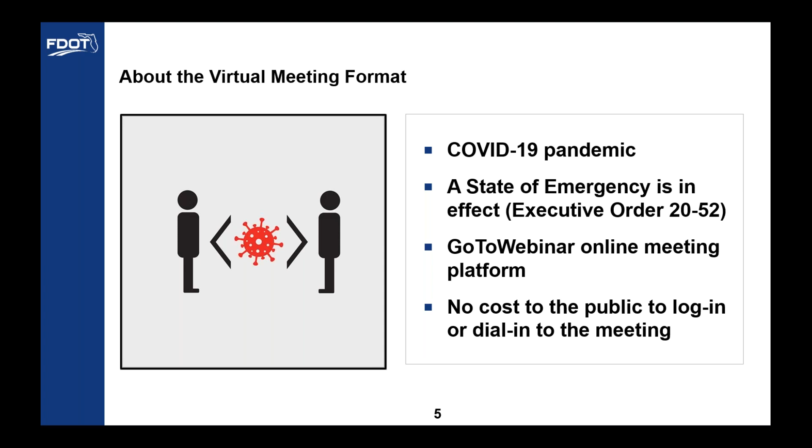On your computer or device screen, you should see something that looks like a control panel in the upper right corner. In it, you will see a chat function. That is what you use to send a comment or question.

For those of you who have dialed into the meeting on a telephone line, and you are viewing a hard copy of the slide presentation, the presenter will announce the page number of the slide being shown on the screen so you can follow along.

All attendees are placed in listen-only mode throughout the presentation and meeting. You can submit comments or questions by typing them in the chat function on the control panel at any time during the meeting. We will provide responses after the presentation, or you can wait to speak at the end of the Q&A session.

This meeting is being recorded and will be available after the meeting. It'll be posted on the project website.

Public notice for this virtual public meeting, including information about how to access the meeting platform, was provided in flyers to property owners and tenants in the project area, a posting in the Florida Administrative Register, advertisement in the Sun Sentinel, and in emails to persons on the project contact list, on social media feeds, and other notification methods. The notice was also posted on the City of Fort Lauderdale's website.

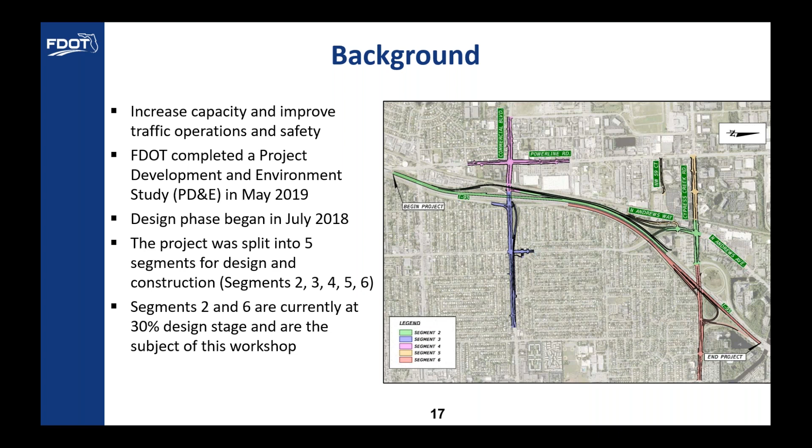FDOT completed what we call a PD&E study, which is a project development and environment study, in May of 2019, and the design phase began in July of 2018. For design purposes, the project has been split into 5 separate segments, starting with segment 2 and running through segment 6, differentiated by the colors you see on the right. What we'll be discussing today are segments 2 and 6 specifically.

Slide 16. Project location. Like I mentioned, we'll be discussing segment 2 and 6 specifically. Segment 2 is shown on the screen in the red color. It includes I-95 southbound from south of Commercial Boulevard to Cypress Creek Road.

It also includes work along North Andrews Avenue, as well as Cypress Creek Road from the SFRTA railroad tracks, which is where Tri-Rail runs, towards the east, towards I-95. Segment 6, which is shown in blue on this figure, covers I-95 northbound and a portion of Cypress Creek Road from I-95 to the east to Northeast 9th Avenue.

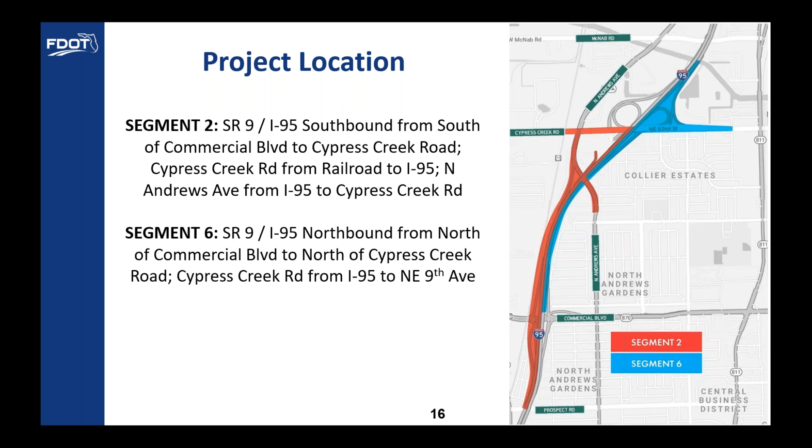Slide 18, I apologize, the numbers are off. Moving into proposed improvements on slide 19, we'll discuss each segment one at a time. We'll start off talking about segment 2, run through a list of the changes that we're proposing, and then move on to segment 6. So what you see up here is the proposed improvements for segment 2.

I-95 southbound within segment 2 will be milled and resurfaced, and we'll have some minor widening for accommodating a new off-ramp. One of the major changes we're proposing here is a new southbound collector distributor road, and a collector distributor road is basically just a ramp. That ramp will run from North Andrews Avenue and the park and ride lot at Cypress Creek Road, over Commercial Boulevard, and then join I-95 southbound. We'll get into more detail with that in just a moment.

We're also going to be milling and resurfacing Cypress Creek Road, as well as some minor widening along Cypress Creek Road. On North Andrews Avenue, we will have milling and resurfacing as well, some minor widening to accommodate bike lanes, but the major improvement there is a replacement of the bridge for Andrews Avenue over I-95. In addition, we're going to have bicycle and pedestrian improvements along Cypress Creek Road, specifically adding a shared use path, a wide path on either side of the roadway that can accommodate pedestrians and bicyclists.

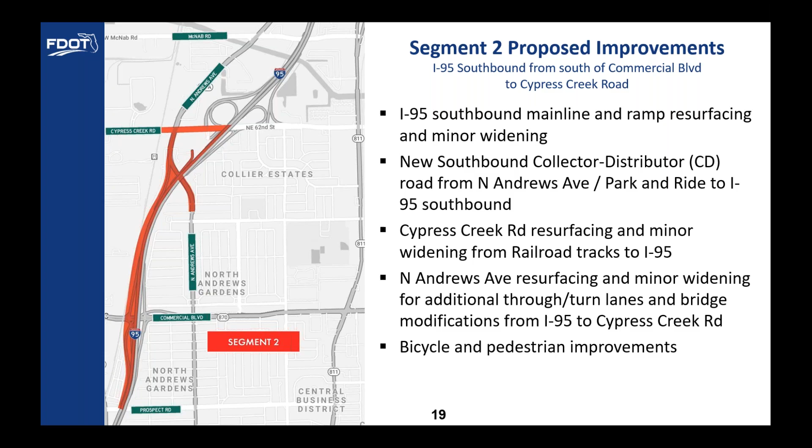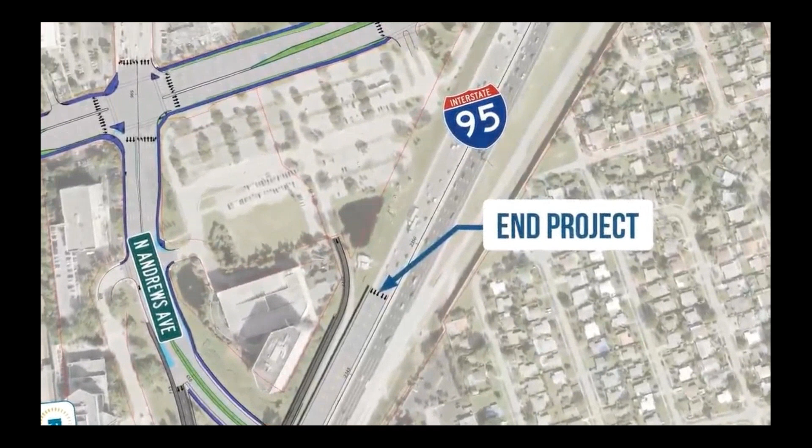Now we have just a short fly through of the improvements that I'll recap again. So you can see here, we'll be going in the direction of traffic along I-95 southbound, starting just south of Cypress Creek Road and heading towards the south. We'll be modifying the existing on-ramp from the park and ride lot as it is today.

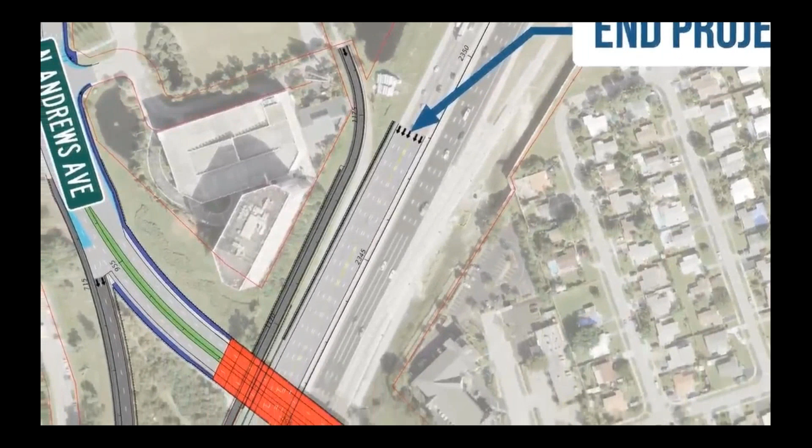That goes directly onto I-95. You can see here, it'll stay separate from I-95, cross under the Andrews Avenue Bridge, and join in with the ramp that comes on from Andrews Avenue. Those two ramps will come together as a 3-lane ramp that eventually drops down to 1.

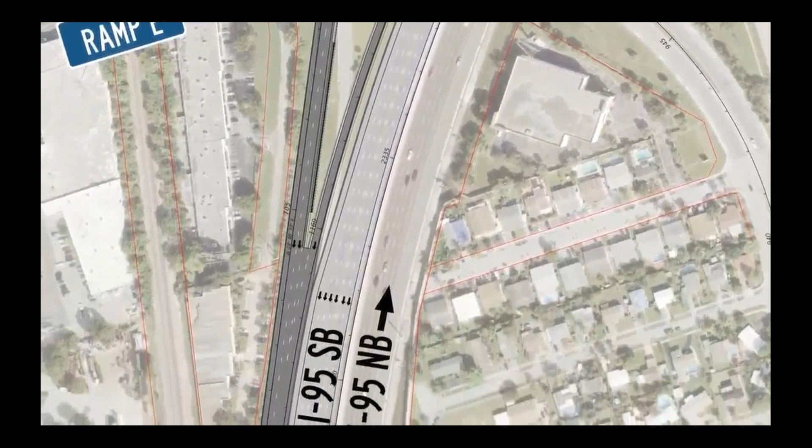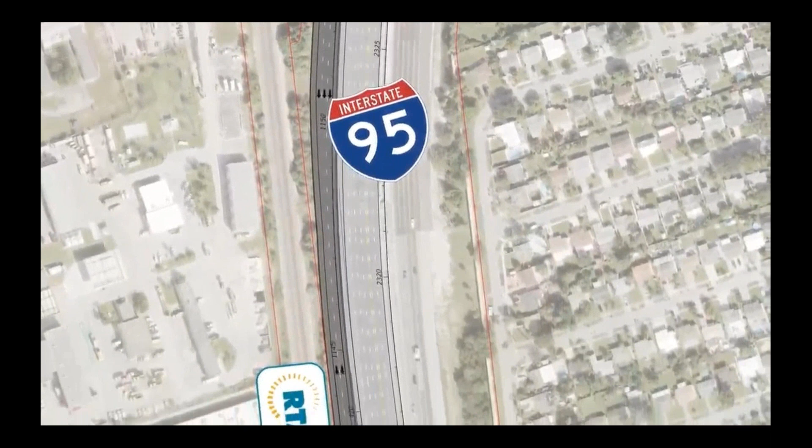That ramp stays barrier separated from the I-95 main line. There won't be any opportunity to join the I-95 main line until you're south of Commercial Boulevard. That will run parallel to the main line between the railroad tracks and I-95 southbound.

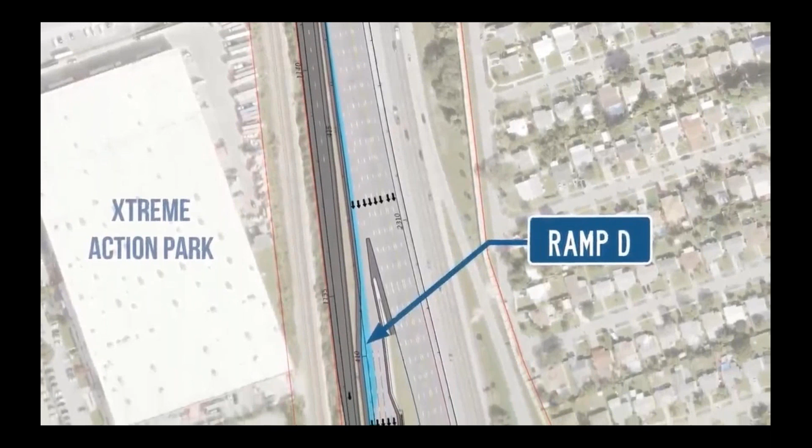What you see here, we're getting to the southbound exit ramp to Commercial Boulevard. That blue area indicates widening. We'll be widening that ramp from a 1-lane ramp to a 2-lane ramp, as well as additional turn lanes at the intersection itself.

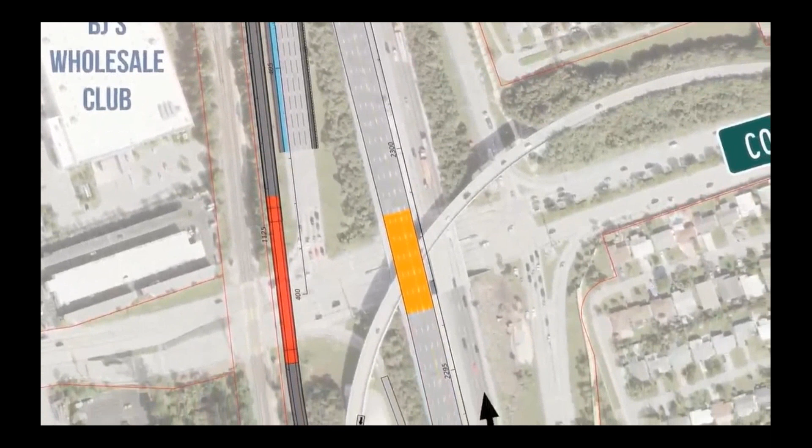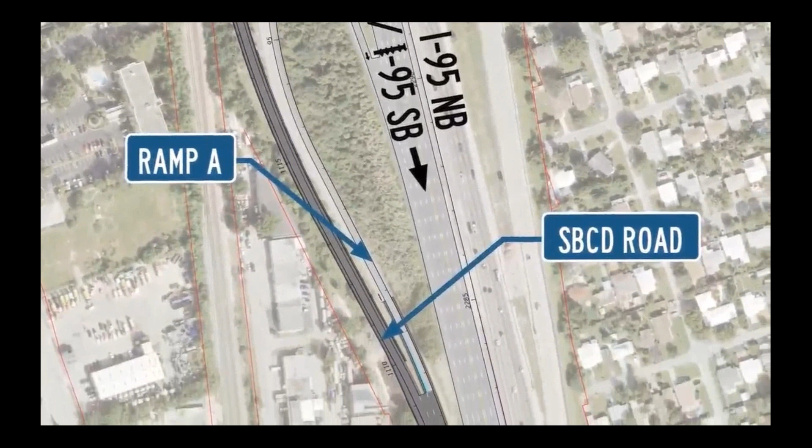Here, our CD road, you see in red, crosses over Commercial Boulevard. That'll be a bridge over Commercial Boulevard. It'll join the existing flyover from westbound Commercial to southbound 95. That'll come together as 1 lane from each movement, and that'll join the I-95 main line, eventually dropping down to 1 lane just north of the Prospect Road bridge.

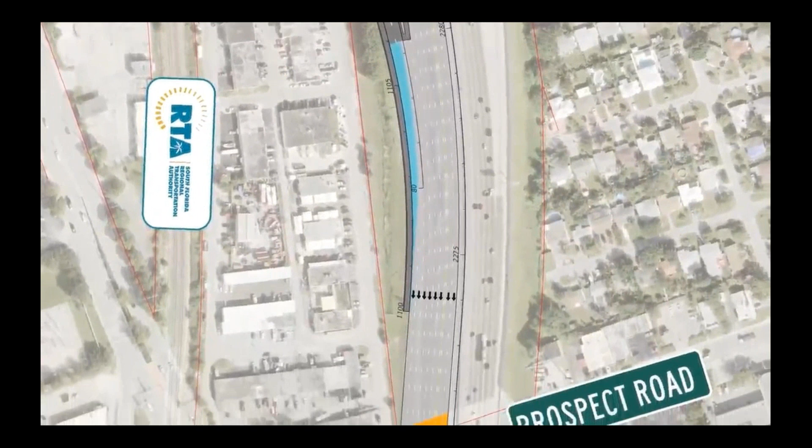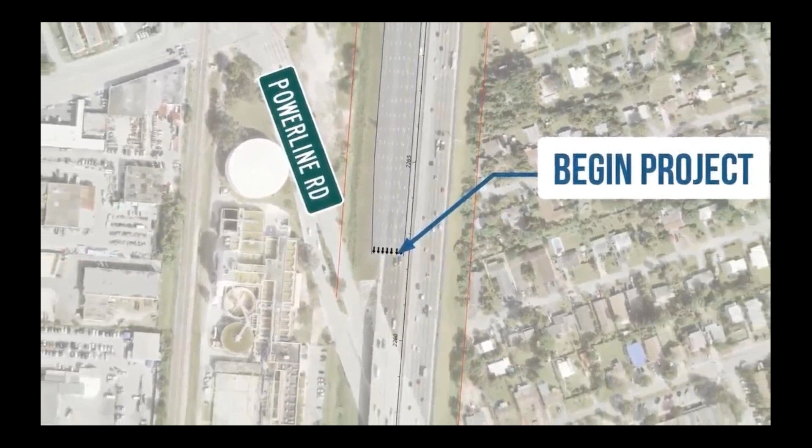And now we'll go over, and that was the improvements on the I-95 main line. We'll go over and look at the improvements on Cypress Creek Road and Andrews Avenue in the next clip of the video.

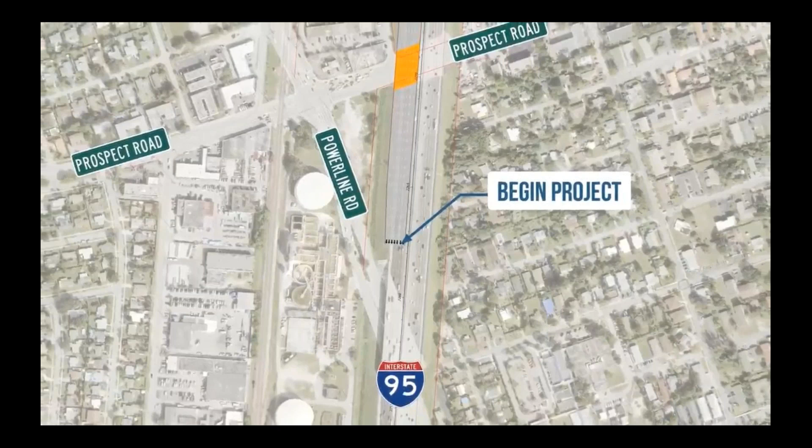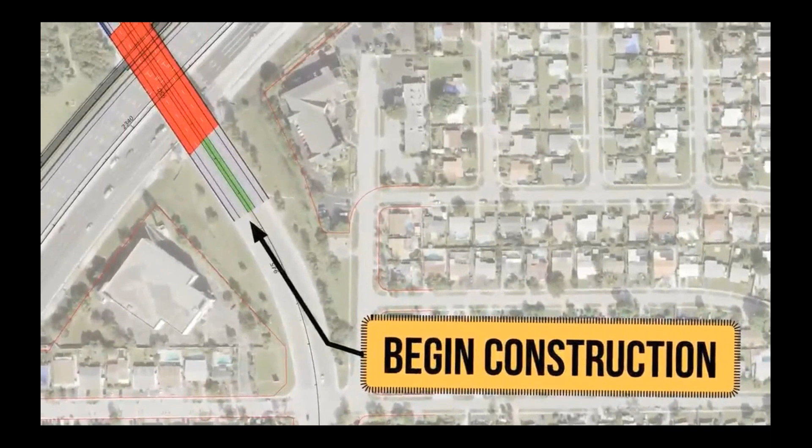So here you can see Andrews Avenue. Like I mentioned, the Andrews Avenue bridge is being replaced. That bridge replacement will accommodate the new on-ramp from the park and ride lot, so that bridge will be lengthened. We'll start working east of I-95, replace the bridge, and continue working west of I-95.

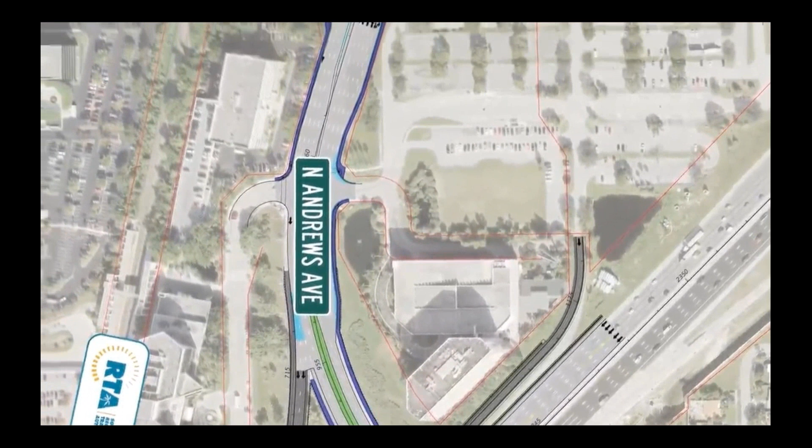There'll be some widening along Andrews Avenue here to accommodate the new 2-lane entrance ramp to southbound 95, as well as bike lanes along Andrews Avenue.

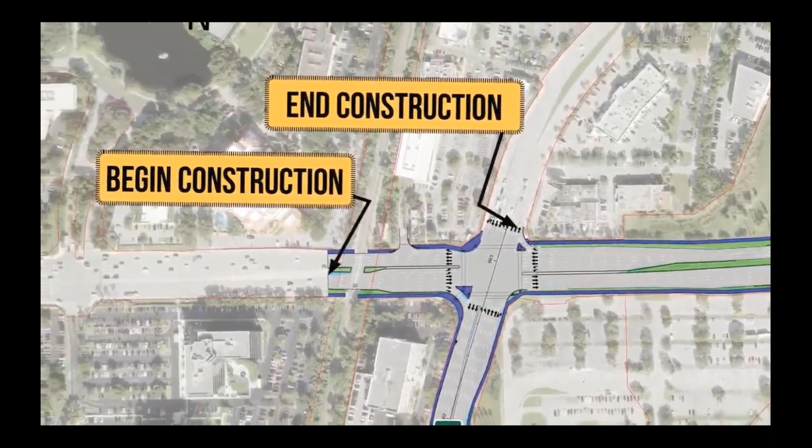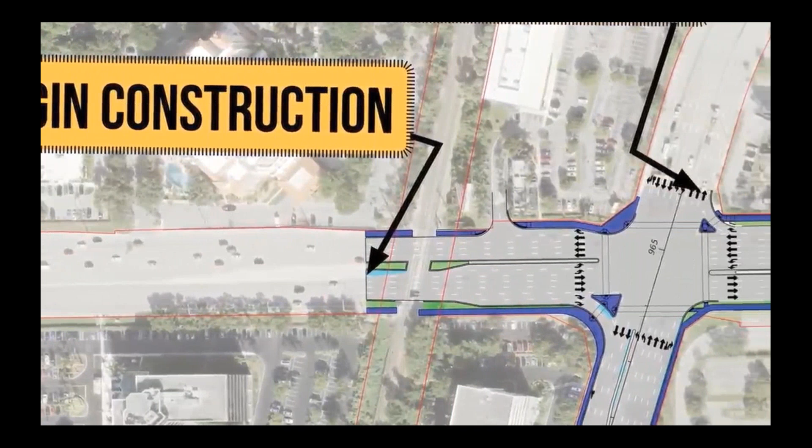When you reach Cypress Creek Road, we'll start our improvements west of the SFRTA railroad tracks. The blue color on the inside there will be some turn lane improvements at the intersection of Cypress Creek Road and Andrews Avenue. We'll be adding double right turn lanes for the eastbound to southbound movement, as well as extending the left turn lanes.

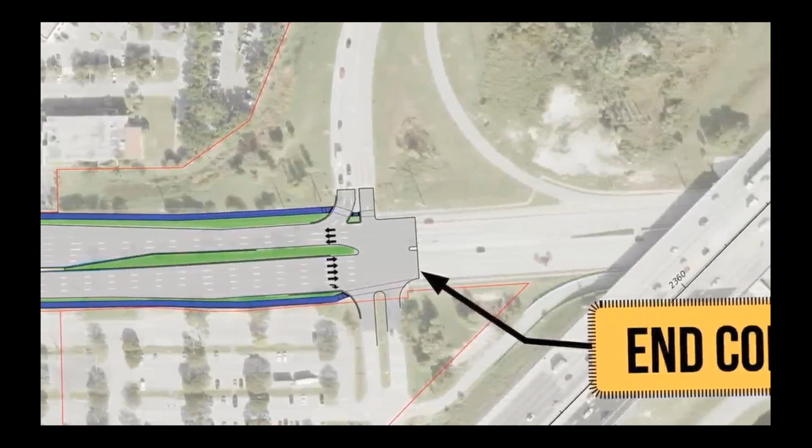The dark blue along the outside represents the shared use path, which is what I mentioned before. This is a wide path that will allow for pedestrians and bicyclists to ride alongside the roadway. The path will be buffer separated from the travel lanes of Cypress Creek Road with an open area.

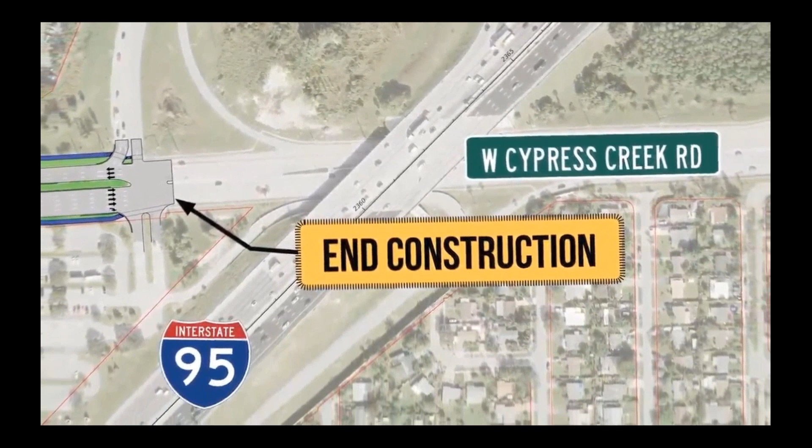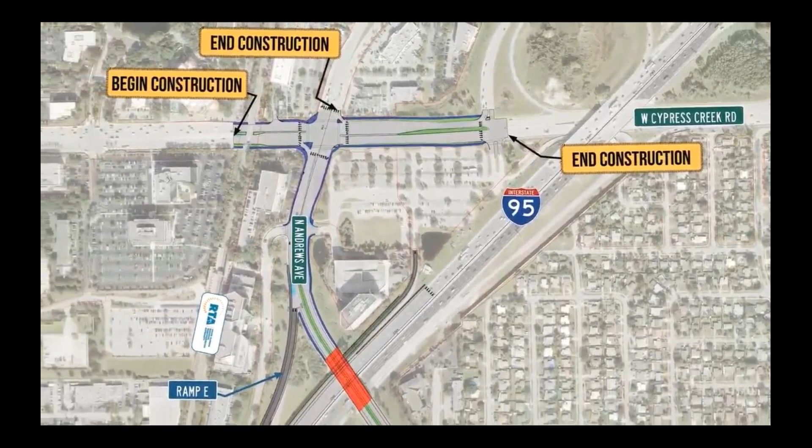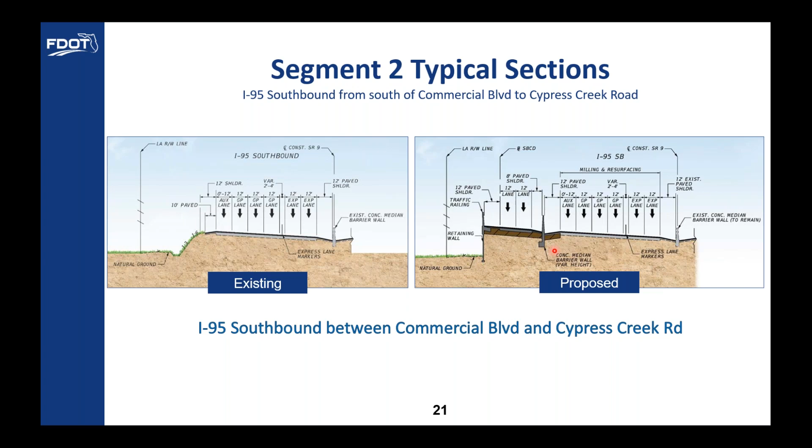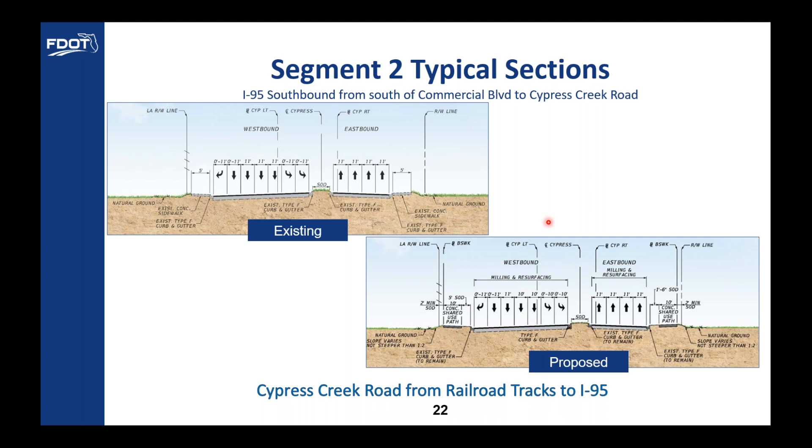So that's the big improvement that's proposed along Cypress Creek Road. And then along Andrews Avenue, not really much of a change again in terms of travel lanes, but we are adding in paved shoulders that can be used as bicycle lanes along Andrews Avenue.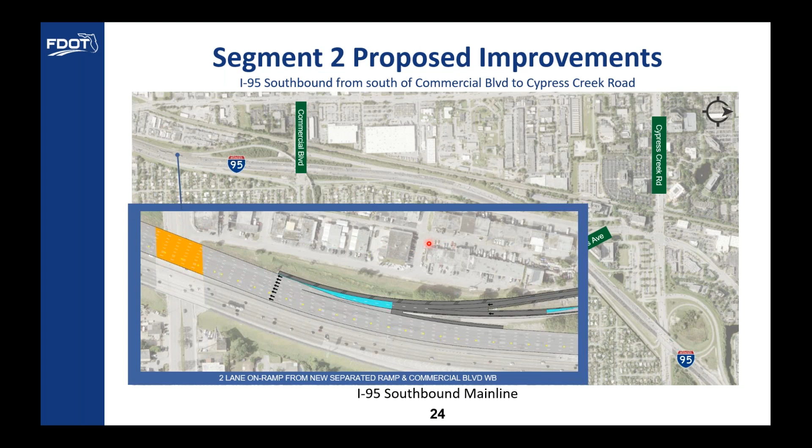Another improvement that we're proposing as part of this project is modifications to the Commercial Boulevard off-ramp. This Commercial Boulevard off-ramp today is a 1-lane ramp, coming off of I-95 and then widening up at the intersection.

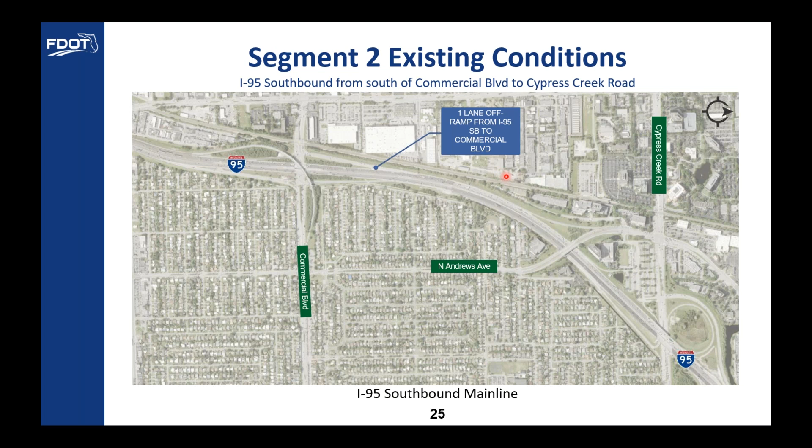If you're familiar with the area, you know that coming on from Andrews Avenue, you do have the option to get off at Commercial. Typically what happens is Andrews Avenue traffic will try to change lanes in what we call a weave movement, getting across to the left-hand side, while traffic trying to exit at Commercial Boulevard is changing lanes, weaving to the right. That weave movement creates friction on I-95, and it creates issues for operations as well as safety. By creating the CD road, or the ramp I showed you on the previous slides, we eliminate that friction.

The other improvement that we're making to the Commercial Boulevard off-ramp is widening it to 2 lanes at I-95 and widening 1 additional lane at the intersection.

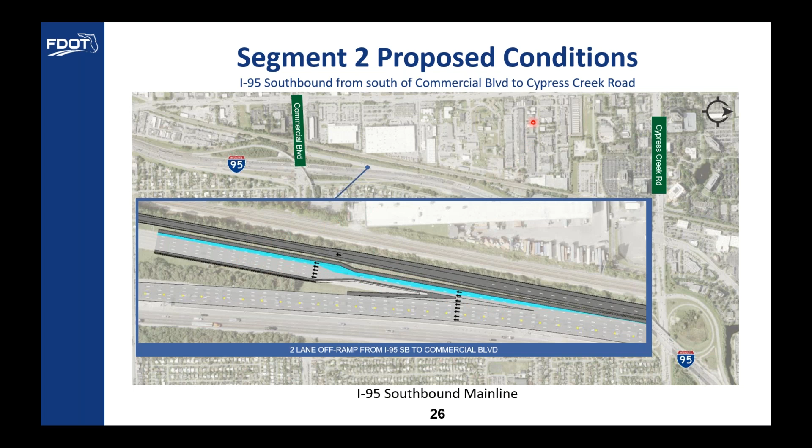Now slide 29 will cover the intersection improvements on the surface streets. This is the existing intersection of Cypress Creek Road and North Andrews Avenue. You can see the existing configurations listed there.

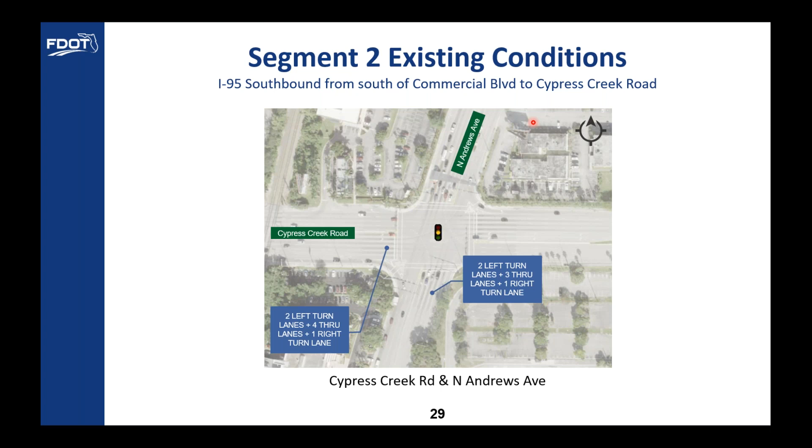Slide 30. We are widening the eastbound to southbound right turn lanes to have 2 right turn lanes. That movement will be signalized to accommodate those double rights; currently, that movement is a yield condition. We are also adding in bike lanes along Andrews Avenue south of Cypress Creek Road, with some minor widening to accommodate those additional bike lanes.

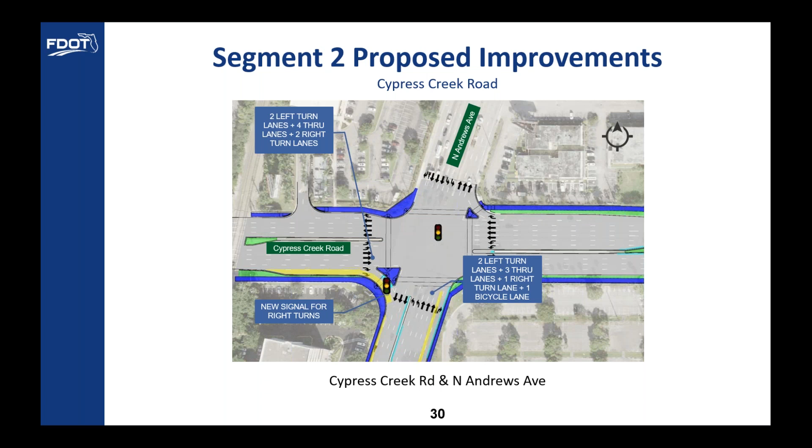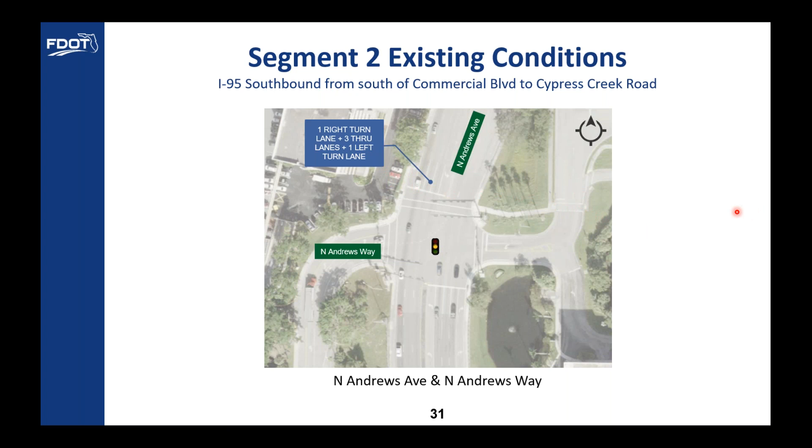Slide 31. This is the intersection of North Andrews Avenue and North Andrews Way. The existing configuration shown here has one right turn lane, three through lanes, and one left turn lane. We will be modifying that to have 3 through lanes, 1 left turn lane, and we will be adding in bicycle lanes along Andrews Avenue.

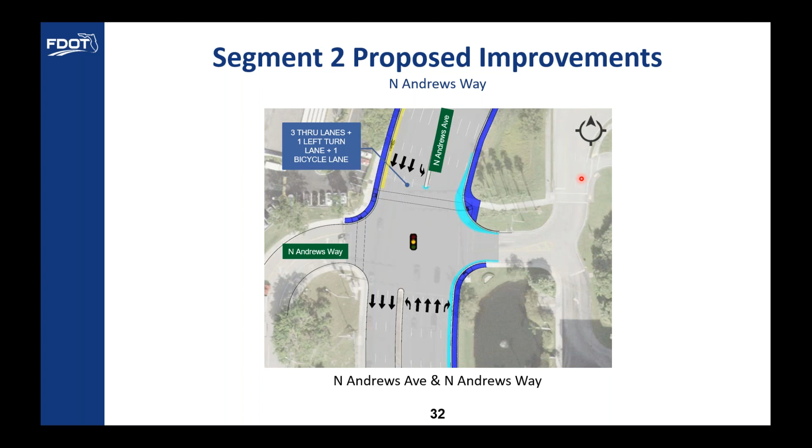Slide 34. Some of the benefits with the work that we're proposing here are shown on this slide. We're increasing capacity with the addition of turn lanes on the I-95 ramp, as well as the addition of turn lanes at the intersection of Cypress Creek Road and Andrews Avenue, and modifications at the North Andrews Avenue intersection.

The other big improvement that we're doing here is improving safety. The biggest improvement in terms of safety and operations is the southbound CD road, or southbound ramp from Andrews Avenue. By barrier separating that ramp and allowing traffic to merge south of Commercial, we're eliminating the weave and friction created between Andrews and Commercial Boulevard. With the elimination of that weave, we expect significant safety benefits as well as operational benefits by not having that conflicting traffic and cross weave movement, as we call it.

We also are improving pedestrian and bicyclist safety by adding shared use paths along Cypress Creek Road. Those paths will provide designated pathways for pedestrians and bicyclists, and they'll be physically separated from vehicular lanes.

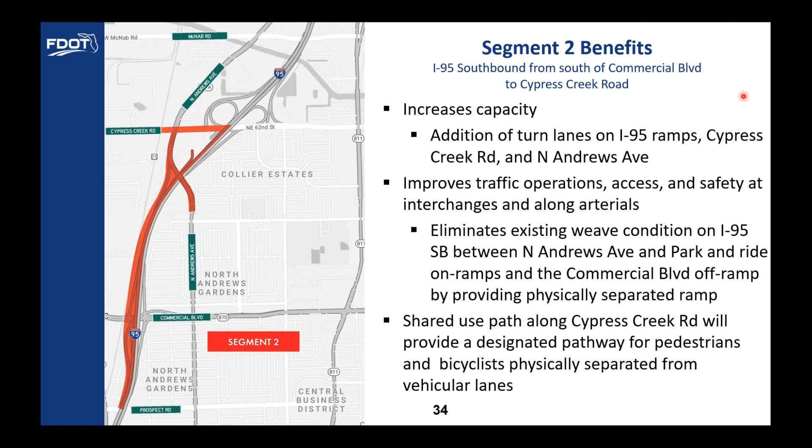So now we'll move on to the segment 6 improvements. That's the area shown in blue on the screen. For segment 6, I-95 northbound main line will be resurfaced, and we will have some minor widening and a new off-ramp location for westbound Cypress Creek Road.

There will also be work along Cypress Creek Road for milling and resurfacing, some minor widening for turn lanes, and we will be making the same bicycle and pedestrian improvements with the addition of the shared use path over towards the east to Northeast 9th Avenue.

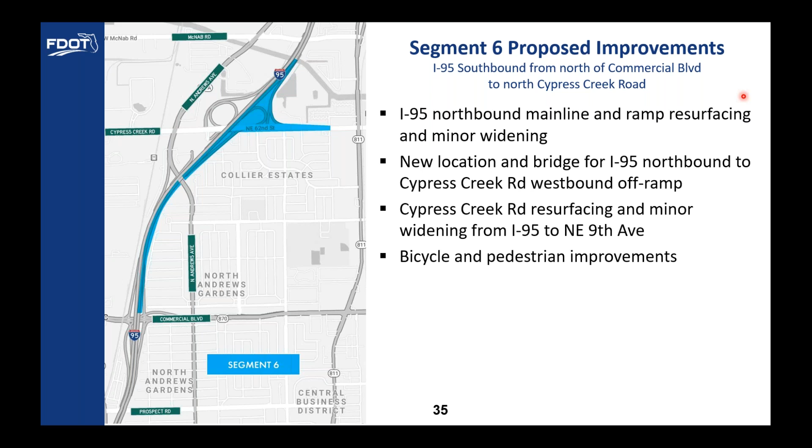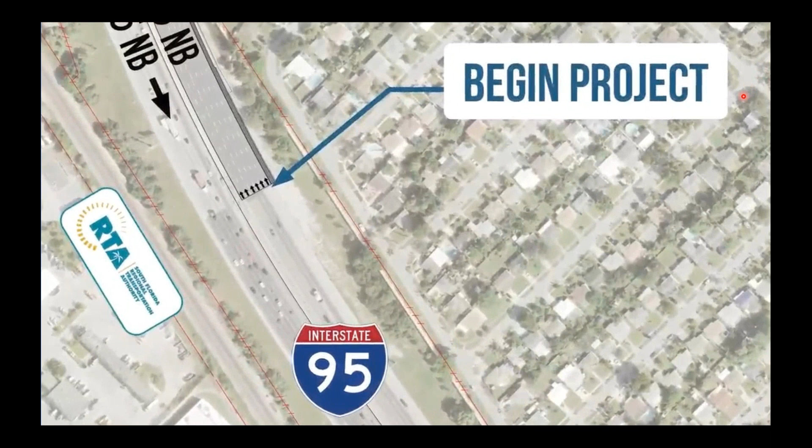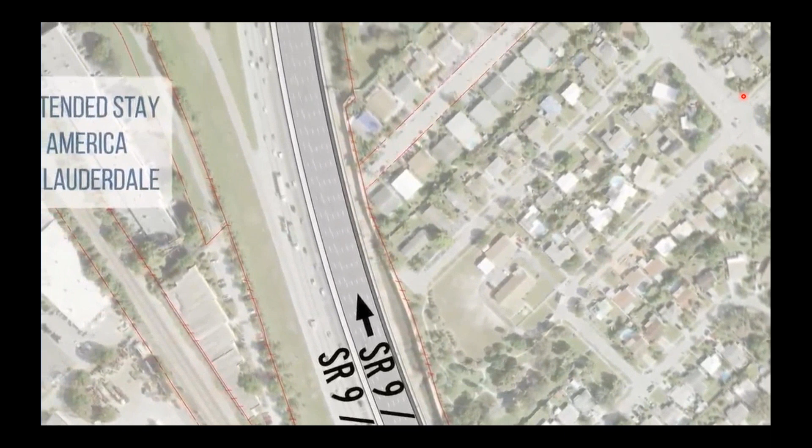So for segment 6, we'll go through the same process here, a fly through of what the proposed improvements are. We're looking at northbound I-95 this time, starting north of Commercial Boulevard. As we move north, only minor resurfacing is proposed here, not really any work or changes. Here we cross under the Andrews Avenue Bridge.

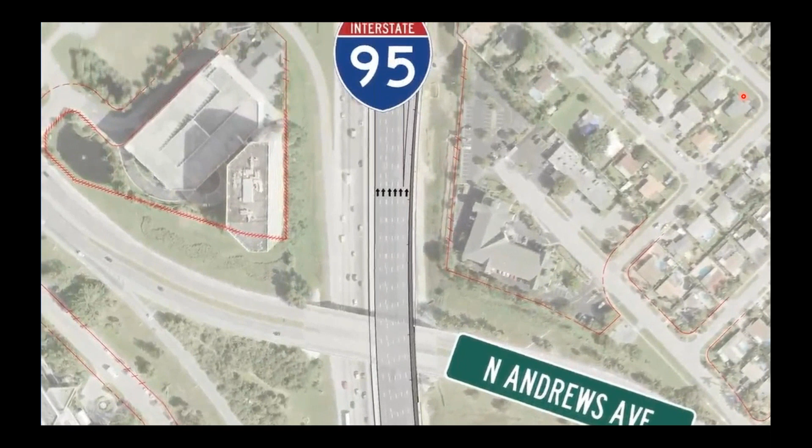That bridge will have been replaced in the previous segment 2. Here you see the off-ramp to eastbound Cypress Creek Road. There are some turn lane improvements we'll cover later, but this is where you see the major improvement.

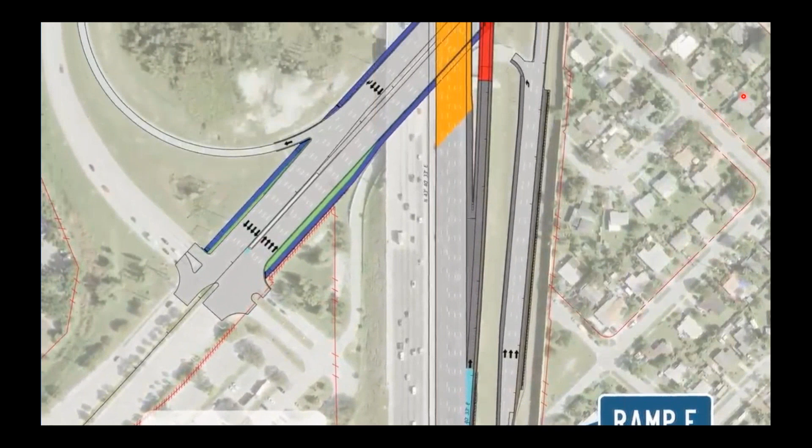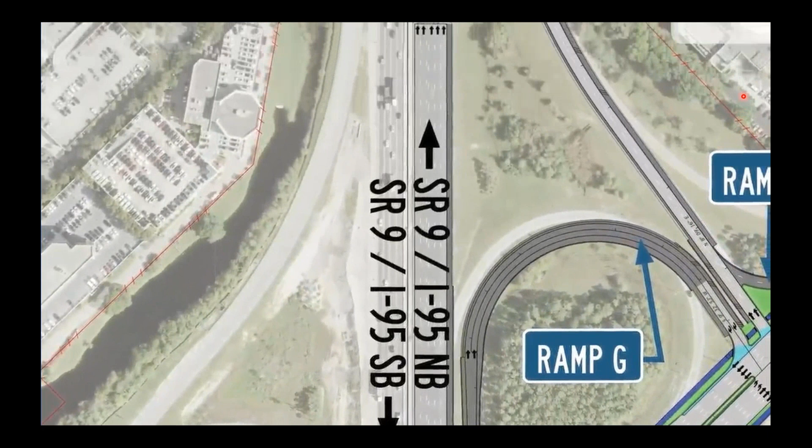The exit for westbound Cypress Creek Road is being moved towards the south. There'll be a new bridge over Cypress Creek Road shown in red, leading into a 2-lane ramp that'll loop around and join westbound Cypress Creek Road. This modification of the exit point allows for more deceleration and improves safety for motorists using the interchange.

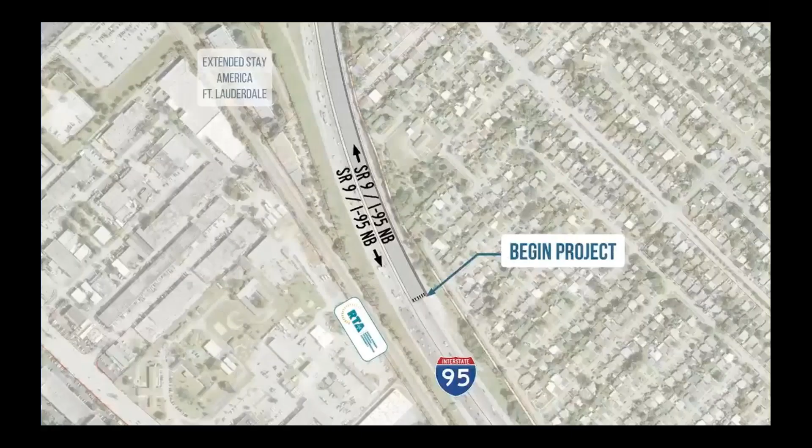All right, so we'll skip over the remainder of that video. I'll show you the improvements on Cypress Creek Road in the next slides.

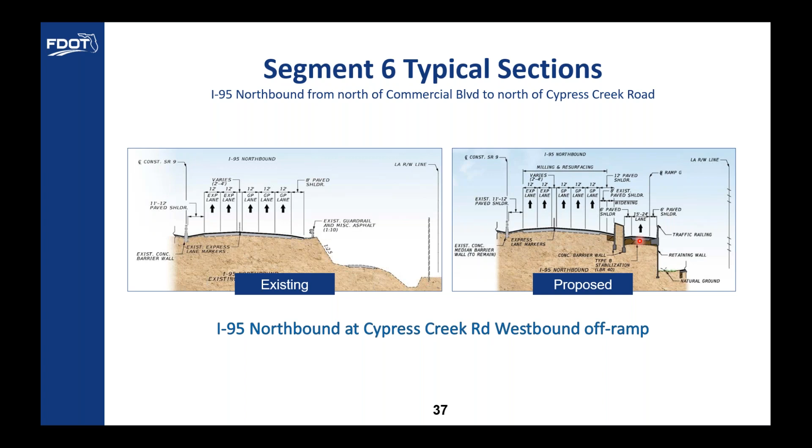Slide 37, we're comparing typical sections again, this time for northbound I-95. This is our project coming in after completion of the express lane project sometime in 2022. There'll be 2 express lanes, 3 general purpose lanes on the I-95 main line. With our project, we'd be adding a new exit ramp to westbound Cypress Creek Road, coming off south of Cypress Creek Road and remaining separated from the main line.

Slide 38, this is comparing Cypress Creek Road east of I-95 this time. You can see the comparison between the existing section and the proposed section. Really no change in the number of lanes. In this case, we are modifying a turn lane, but the big change here is the addition of the 10-foot shared use path and the buffer separation between the shared use path and the curb and gutter.

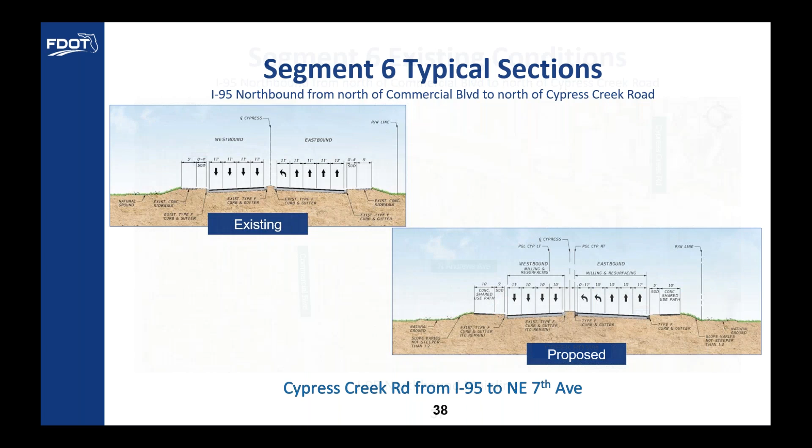Slide 37, here we'll compare in plan view the improvements to what's out there existing today. You can see the existing off-ramp for northbound 95 to westbound Cypress Creek Road is a single lane ramp. That ramp comes off north of the Cypress Creek Road Bridge. If you're familiar with the area, you know that exit requires you to slow down immediately to go around the curve there.

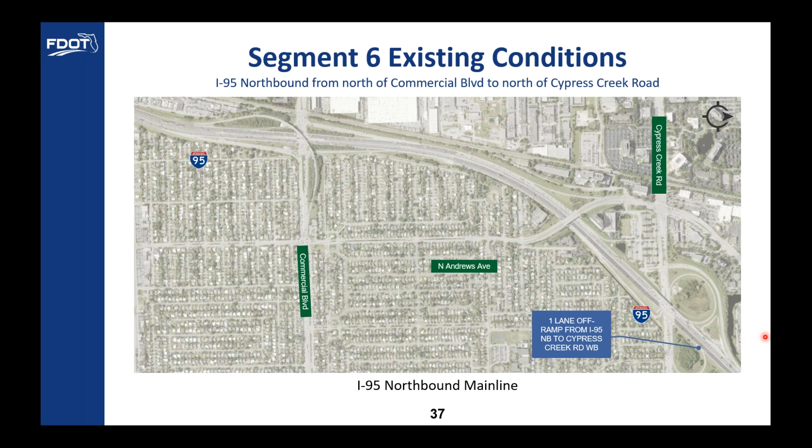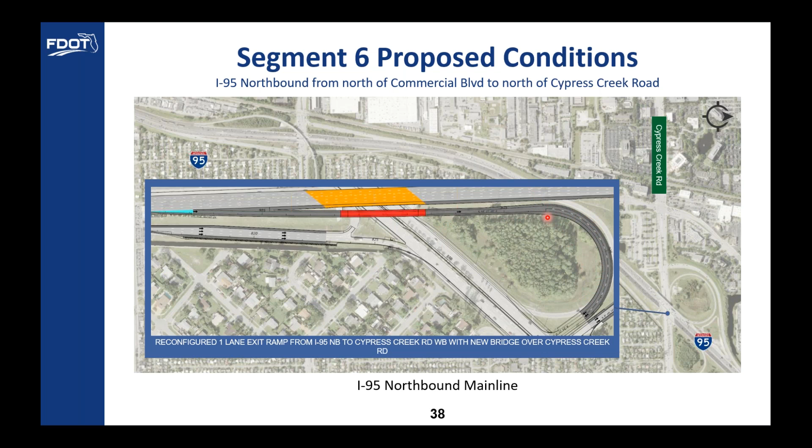On slide 38, with our proposed improvements, we will be moving that exit point back towards the south of Cypress Creek Road. Drivers will exit here and have plenty of time to decelerate before getting to the loop. This loop ramp will be widened from one existing lane today to 2 lanes.

Slide 39. This is the existing configuration for Cypress Creek Road at the northbound ramps. You can see the northbound to westbound ramp is a free flow movement, 1 lane. Same thing with the northbound to eastbound ramp, a 1 lane free flow movement.

In this configuration as well, you do have another weave movement on Cypress Creek Road westbound. Traffic coming off of this ramp is looking to change lanes to the left to avoid being trapped onto southbound I-95, while traffic on Cypress Creek Road is looking to change lanes to the right.

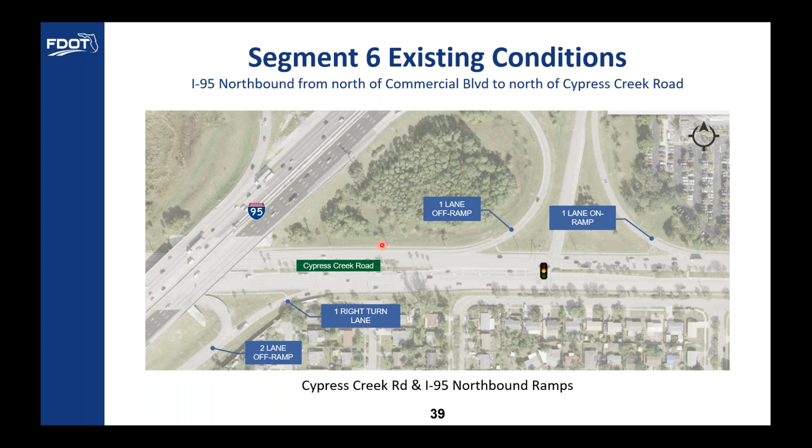So that's slide 40 with our proposed improvements. We are modifying that intersection configuration. The northbound to westbound ramp is being modified to a 2-lane ramp, like I mentioned before, but this will be a signalized intersection here.

So traffic coming off this ramp will stop at the signal, and when they get the green signal, they'll be able to turn. By doing this, we've eliminated the weave. Traffic will come out off the ramp into their lanes, and they won't be trapped in that rightmost lane to go onto southbound 95.

Similarly, on the northbound off-ramp to eastbound, we're modifying this ramp to be a 2-lane off-ramp instead of the 1-lane ramp that's there today. This movement will also be signalized and allow for traffic to come out onto Cypress Creek Road with the green signal.

Slide 41, we're looking at the intersection now of Northeast 7th Avenue and Cypress Creek Road. You can see the existing configuration is shown in the text there, one left turn lane with three through lanes. Slide 42, we are adding a second left turn lane, so we'll have dual left turns from eastbound to northbound 7th Avenue.

In slide 45, we'll discuss the benefits for segment 6. Similar to segment 2, we have increased capacity by adding in turn lanes at the I-95 ramps and Cypress Creek Road. We're also improving traffic operations and safety by reconfiguring the Cypress Creek Road westbound off-ramp.

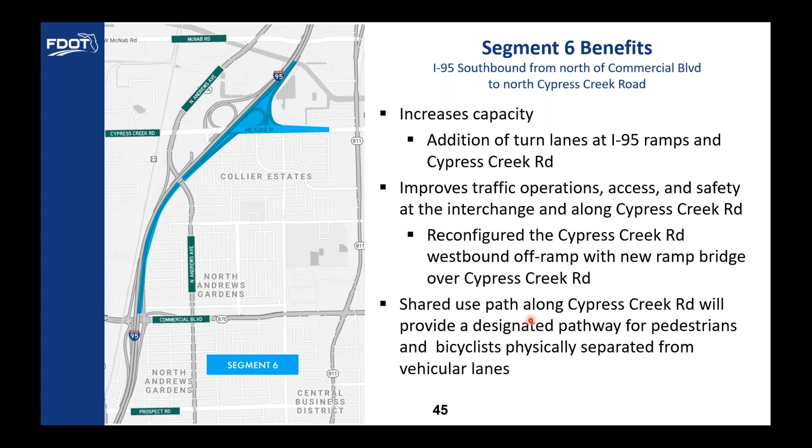In the case of I-95, that'll happen at night. On Cypress Creek Road, that'll happen at night, as well as midday during the off-peak times, so not during rush hour. There will be lane closures for the sidewalk work and resurfacing work. Any overhead work, such as bridge construction work, will require a full closure of traffic underneath, and we'll make notices to the public well in advance, happening at night during off-peak hours.

When necessary, we'll provide pedestrian detours to make sure that we maintain connectivity at all times, and we will maintain access to properties at all times. So driveways for residences and businesses won't be impacted.

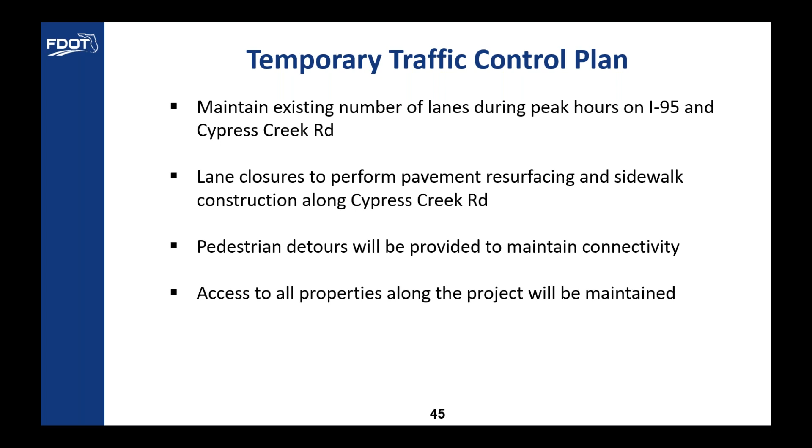And with that, I will turn it back over to Kenzo.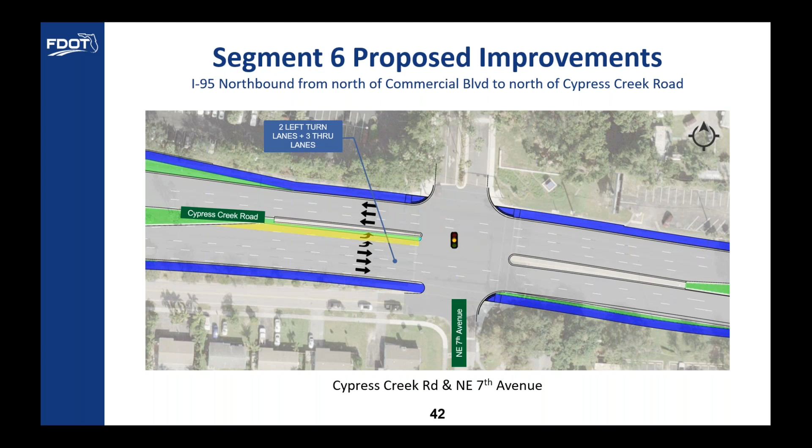All right, you see right here where the corner is at. No, you passed it, go back to 47 again. 45, or... sorry about that, go back one more, keep going. That's 7th Avenue intersection. I don't think you could put the sound barrier all the way down there, guys, I don't think it's going to go all the way down there, I don't think you have room.

Right here, okay, right where you have the light at on the off ramp, going eastbound, that street you see right there is 3rd Terrace. Right there, that's 3rd Terrace. There's just a fence there and a guardrail, at the end of the street. They've had to replace that guardrail 3 times already because of multiple cars coming through that fence and guardrail.

But my concern is there's a lot right there at the end where the kids from this neighborhood play all the time, because it's good enough to play a football game in. And if we have more traffic coming out there, I'm really concerned about not putting the wall up there, guys. I really am.

I was asking regarding the wall. I don't know if you heard earlier when Kenzo was speaking. The PD&E study looked at the potential for a wall here. They looked at 2 options: a 12-foot high wall, but they decided that wasn't enough noise abatement. And they looked at a 14-foot high noise wall, and their recommendation was that there's sufficient noise abatement there. They recommended that we reevaluate that in the design phase, which is where we're at now.

So we're working with the noise specialist to get that evaluated and confirm what was in the PD&E findings. The area being evaluated is from where the noise wall ends today, somewhere around here behind these trees. We're looking at extending it as far east as we can before we get to this intersection. So all that analysis has to happen, and that's happening in this phase now before we get to our next step in our plans. But we will have an answer for you, definitely before design is complete. We are looking at that from a noise abatement standpoint.